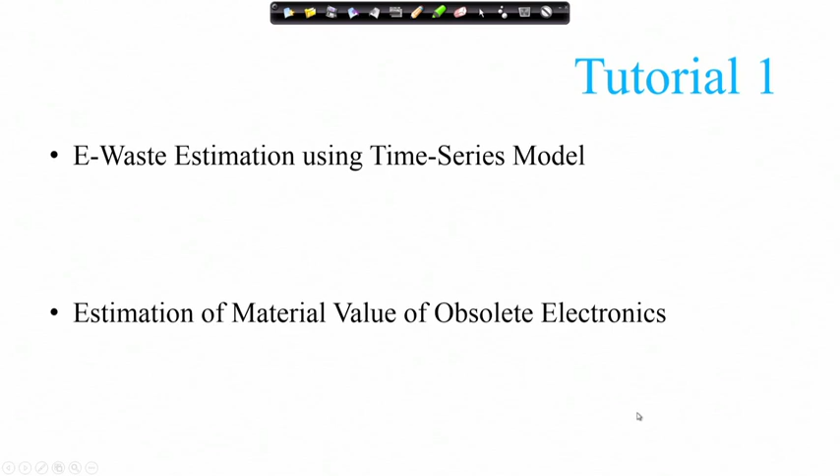Let us start with the first module. In this module we will discuss e-waste estimation using a time series model, and second, estimation of material value of obsolete electronics.

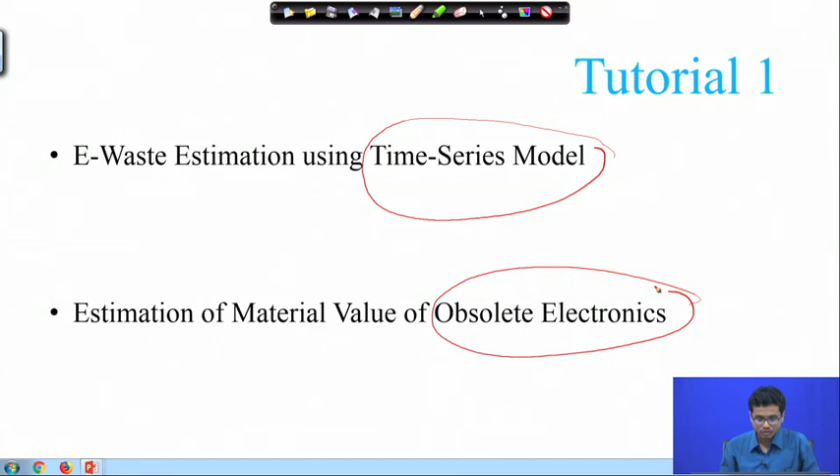Let us start with the time series model. This is our typical time series model. What is it? You purchase some electronic items, or in a year, for a state or country, the total purchase of electronic items is enormous. These items will become obsolete after their end of life period.

What is end of life period? It is different for different items. For example, for mobiles it could be 3 years, but for refrigerators it may be 7 or 8 years, and for televisions it may be 8 or 9 years. It basically depends on the product.

Once it becomes obsolete, it can be reused, it can be stored, it can be recycled, or it can be landfilled.

After reuse, what is the way of reuse? You can donate to relatives, give it to a friend or sister. What is storing? You can store it in your home. What is recycling? You can recycle through a formal recycler.

These days in India we do not have much formal recycling facility. Mostly we deal with informal recyclers, like the kabadiwala who comes to your house and collects your electronic instruments. The third and last option is landfill.

So reuse and storage are intermediate options, while recycle and landfill are final options. A reused item can again be stored, recycled, or landfilled - moving to option 2, 3, or 4. Similarly, a stored item can go to recycle or landfill, since these are our last options.

x1 to x11 represent the fraction of obsolete electronics items for various end of life scenarios. Now let's move to the next slide.

Before calculating the total amount of obsolete electronics items, you have to keep certain factors in mind. What are these factors?

In our model, we can consider transboundary movement, but we have not considered it in this model - this is a drawback. So there is a total ban on illegal export of electronic items we should note.

We have assumed the lifespan of reused and stored electronics items is 3 years. This could change - it could be 2 years, 1.5 years, or more than 3 years, 3.5 years, or 4 years - but that depends on actual observation. This data is based on certain literature and sources.

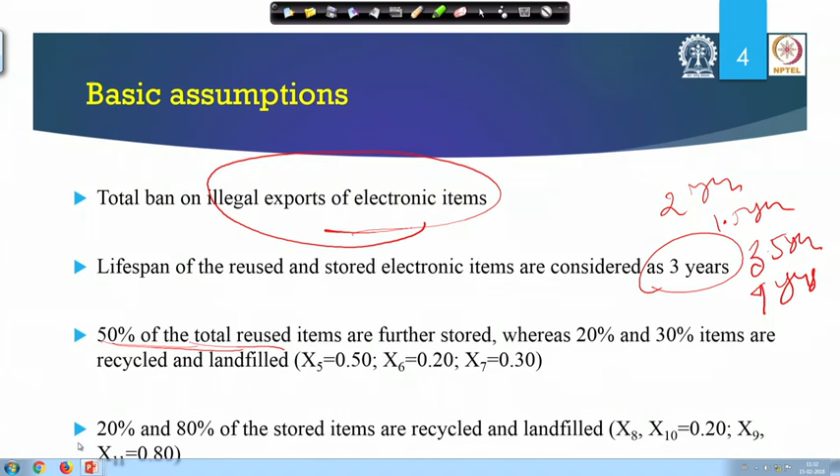50% of reused items are further stored, whereas 20% and 30% of items are recycled and landfilled respectively. This is another assumption. After the end of life period, if you go back to the previous slide, you'll see that after reusing, you can store, recycle, or landfill the item. This period is 3 years.

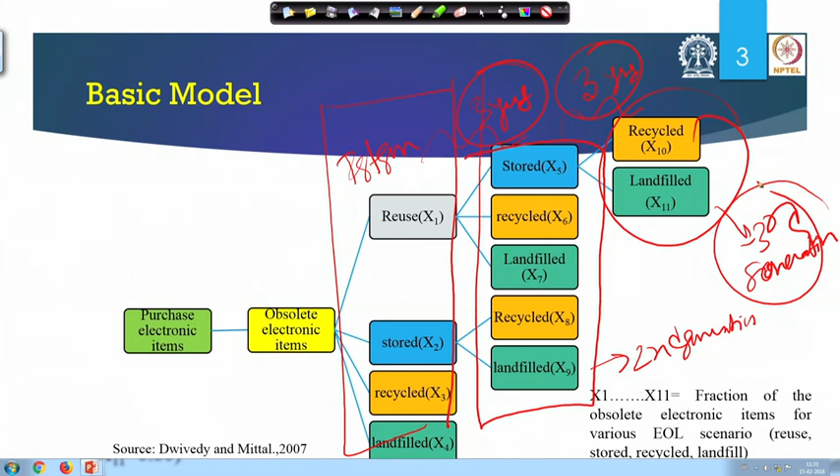If you reuse your electronic items and store them, we are assuming this time span is 3 years. Again, if you recycle your stored item after 3 years, these values also we are keeping constant at 3 years. So, this is my first generation use, this is my second generation, this is my third generation. For all cases we are assuming 3 years, though this could vary.

And 20 and 80% of the stored items which are coming to the third generation are recycled and landfilled. These values are all based on certain assumptions.

Now we are going to a typical example. These are the data. Suppose you have the data of refrigerators under Kolkata Metropolitan Area. We have collected some sales figure data of refrigerators there, all in numbers. If you see these values, they are quite high, for 2000, 2001 we have all the data.

Now, if you have to estimate the total amount of obsolete electronics in 2016, you can also calculate the total amount of recycled refrigerators in 2016, the total amount of stored refrigerators in 2016, and the total amount of landfill refrigerators in 2016. For that you need a time series model equation, knowing the basic data.

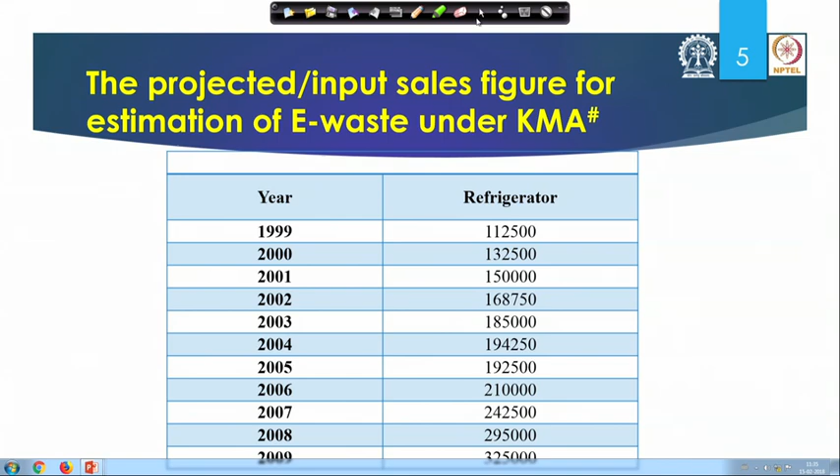So how to estimate? We have developed this equation. How have we developed this equation? What, how to develop it? This is the major thing we have asked in the forum also. So how is it developed?

First thing, suppose you take a refrigerator, its amount is X, suppose in 2016. As I have already given the example, you want to determine the reuse quantity, stored quantity, recycle quantity, landfill quantity. How to calculate? First, say for example in refrigerator, OK, what is O_k? O_k is the quantity of the obsolete item for the year k. And you should keep in mind the lifespan of the refrigerator.

Lifespan of the refrigerator is 11 years. So that means in 2016, those refrigerators purchased in 2005 will become obsolete in 2016. You should keep this in mind, because in the calculation most of the time we make mistakes. We are not taking into consideration the lifespan of the refrigerator.

Because this is just the single example of refrigerator, now if you include various kinds of electronics, there are different types of lifespans. You have to take into account all of the lifespans of all the electronics items. Then you have to develop a step by step equation for each electronics item.

So this x number of refrigerators become obsolete in 2016, reaching end of life in 2016. Now, how to calculate the stored item? The recycle amount which reached its end of life period in 2016, as well as which became obsolete in 2013, because the amount which became obsolete in 2016 we stored for 3 more years as per the model.

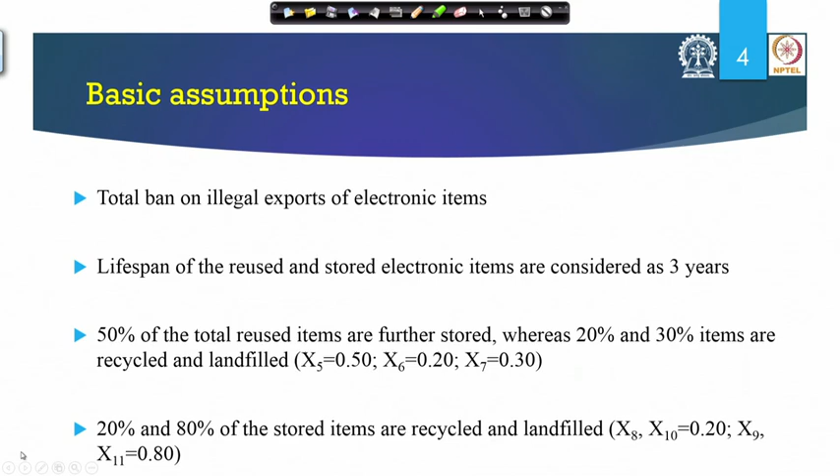Similarly for recycle items, if you look at the model, the amount which became obsolete in 2016, the amount which became obsolete in 2013, the amount which became obsolete in 2010. In a similar way you have to calculate it for landfill also.

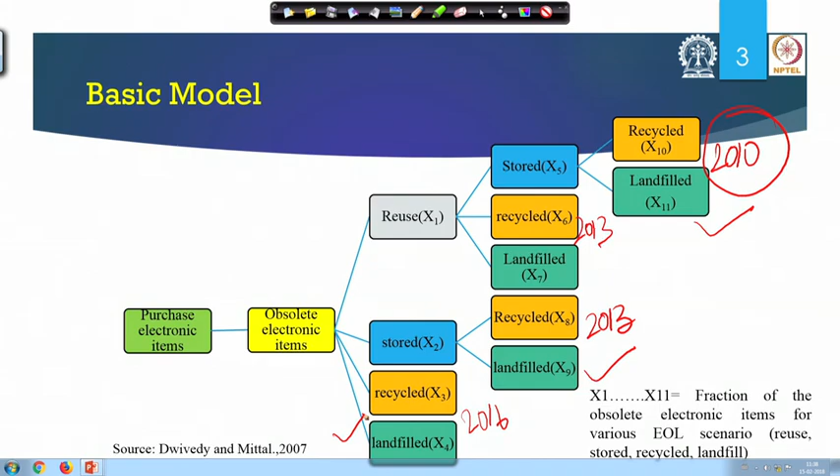This problem we use typically for our research purpose. You do not expect this kind of problem to be given in your end exam, but you should know the logic behind the time series model.

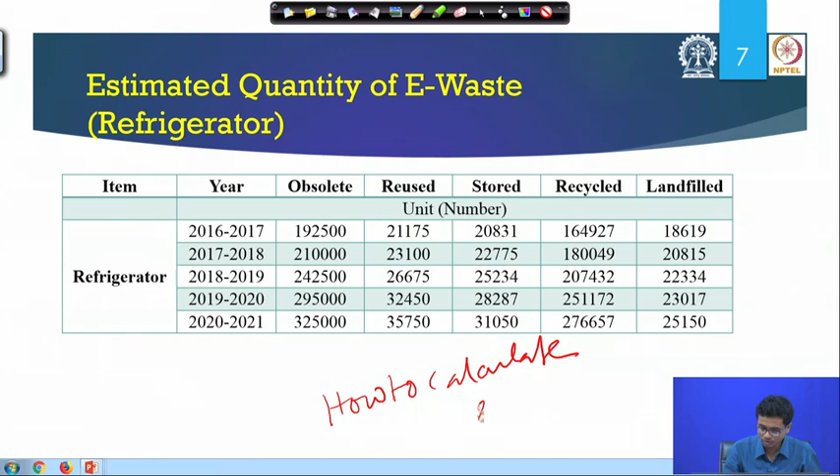Now, suppose you determine the total amount of obsolete, reused, stored, recycled, and landfill refrigerators. How do you calculate the economic value of this electronic item?

There are two procedures. First, you can multiply the number with the weight of an individual item. If you know the weight of the refrigerator, say y, then the total reuse item value would be 21175 into y, in grams or kg, whatever the case may be.

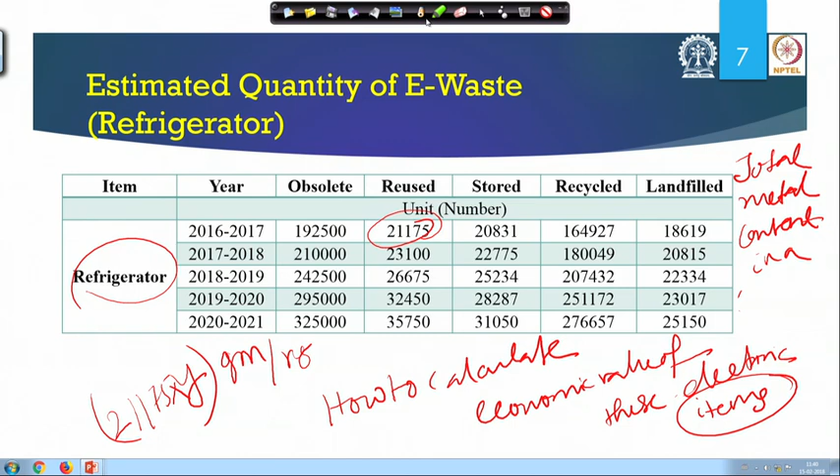Another way is, if you know the number, you go through the total metal content in a refrigerator. In the next slide we have shown it.

These are the typical metal contents in different kinds of electronic items. Here refrigerator is not mentioned, but we have the data for refrigerator also. So let's look at how to determine the value for a smartphone.

So what is the value for a smartphone? Column 10 is for the smartphone. These are the total metal content in a smartphone. Aluminum is 2.9 grams in one smartphone, per unit.

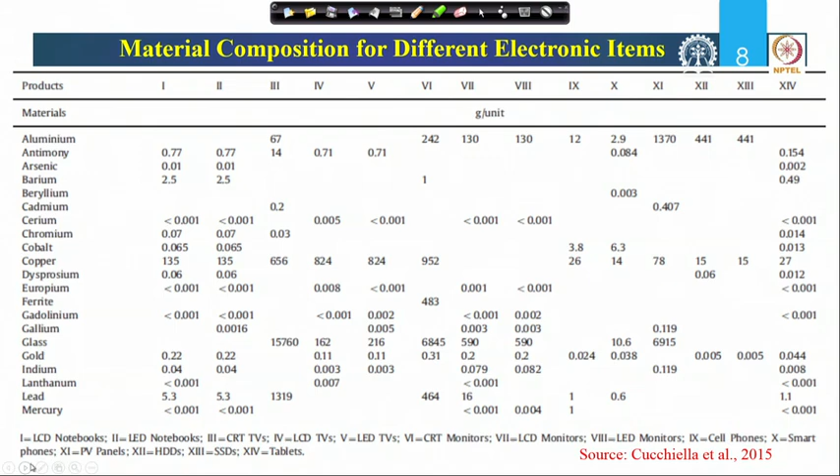Another element is antimony. This way, the total metal content is given. So you determine the total metal content and then determine the total material value in a single smartphone.

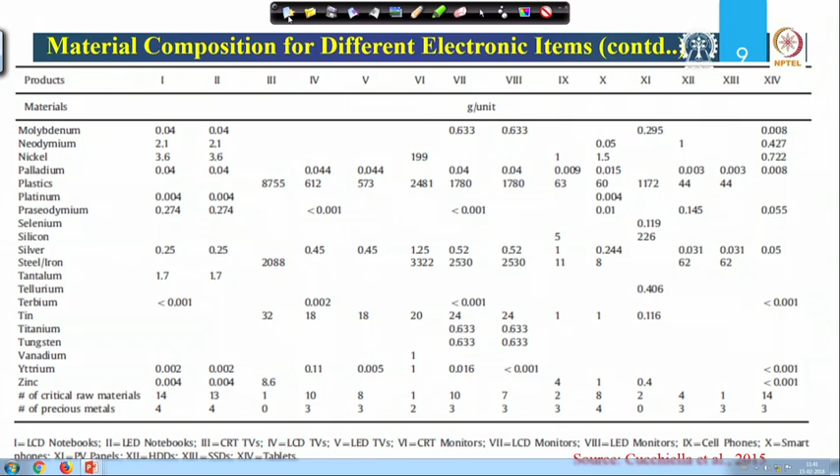Like we have calculated, it comes around very small. For a smartphone it is 174.71, approximately 175 rupees. But when you look at the quantity, the number of smartphones that become obsolete in a year is in the order of 10 to the power 5.

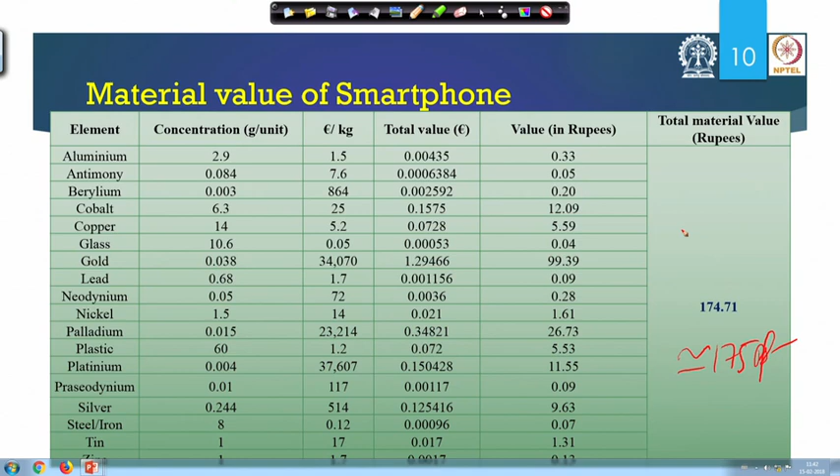Say for example, around 2.5 into 10 to the power 5 — assume your smartphone's total obsolete quantity is 2.5 into 10 to the power 5. If you multiply this with 175, it's a huge amount that we are landfilling, or otherwise sending to informal recyclers.

What the informal recyclers do is collect this metal through unscientific ways and sell it to authorized recyclers. That way they earn money.

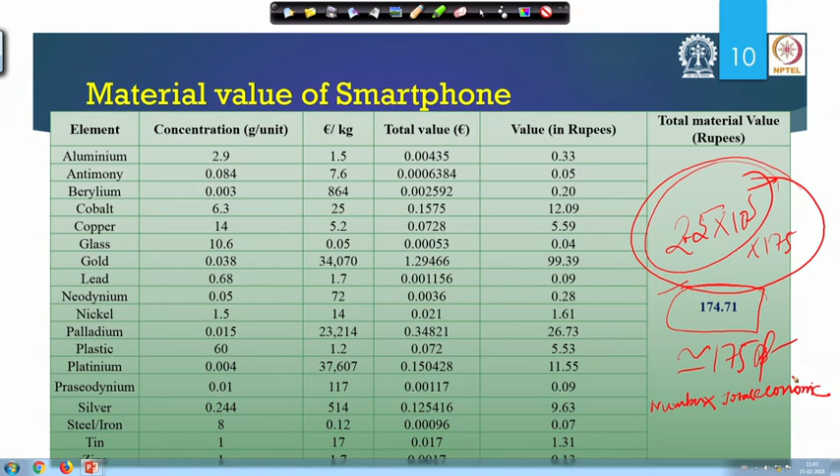So this way you can calculate the total economic value of an electronic item. You can multiply the number with the total economic value of a single item — that is, number of obsolete items into value of a single item.

This way you can determine it. Otherwise, if you know the number, you multiply it with the weight in grams or kg, and then determine the value in terms of money — the economic value per kg or gram.

So this way you can calculate the total economic value from a recycled electronic product or from a stored electronic product, whichever way you want to calculate it.